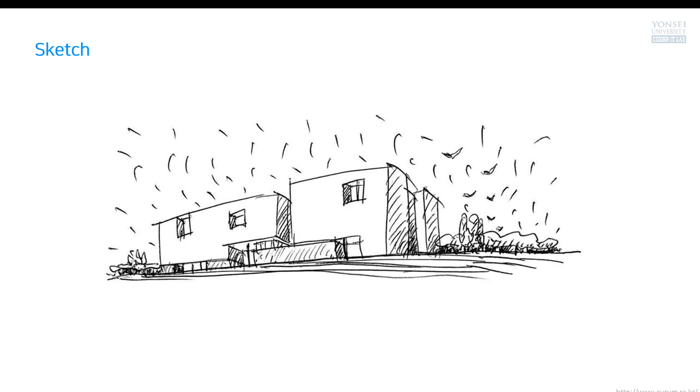At first, I show you this one, sketch. Take a look. It's a real sketch, hand drawing sketch. I'm not sure the concept of this one, but obviously it looks like some kind of huge mass object. But take a look. What if this mass was something like this? One piece of mass, one chunk of mass. That's not that interesting, right?

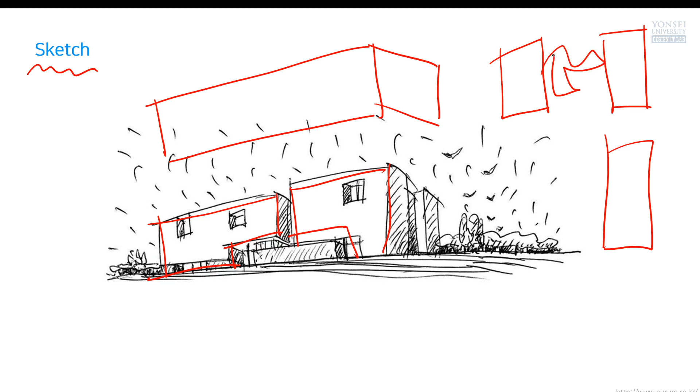But what if the architect designed something like this, small sized or high rise or some totally different shape? In that case, some efficiency or some economical problem possibly happened, right? But this is too boring, right? It's too much simple and kind of classic, old-fashioned modern building.

So the architect's intent was something cut off the mass here, and something inset, and something divided, and so on from this chunk of mass. I'm not talking about the concept or some approaches. I'd like to show you the actual example, actual dormitory. You're supposed to be here anyway.

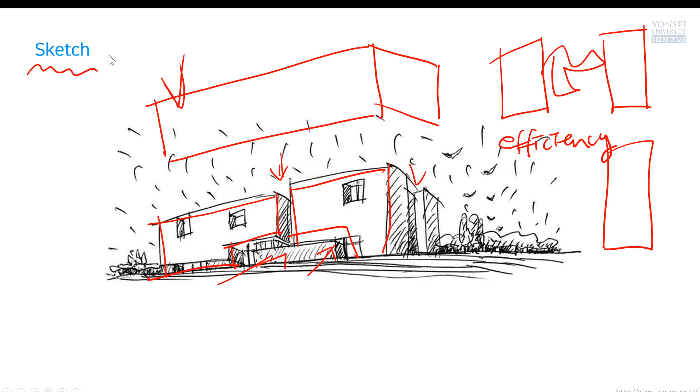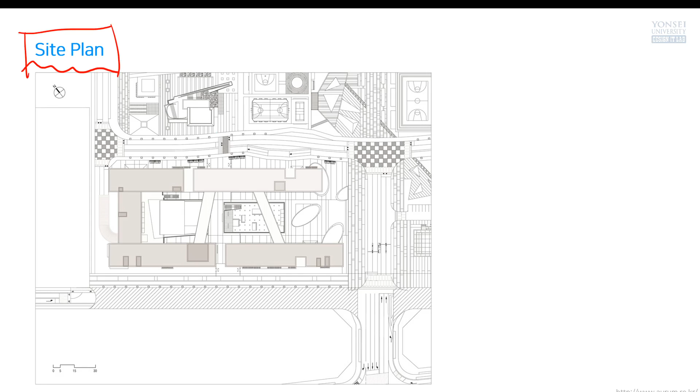Next thing is site plan. I showed you sketch, but actually this is not sort of industry standard, okay? Site plan, actually this is one of the industry standard drawings. At the beginning of the drawing representation, site plan helps people understand the building mass, take a look. Two long rectangle shapes and their connection, and two bridges and some cuts, some insets anyway. So thanks to site plan, we can find out the building's mass.

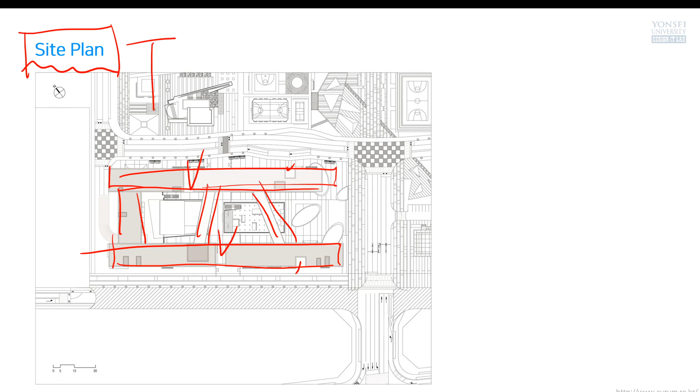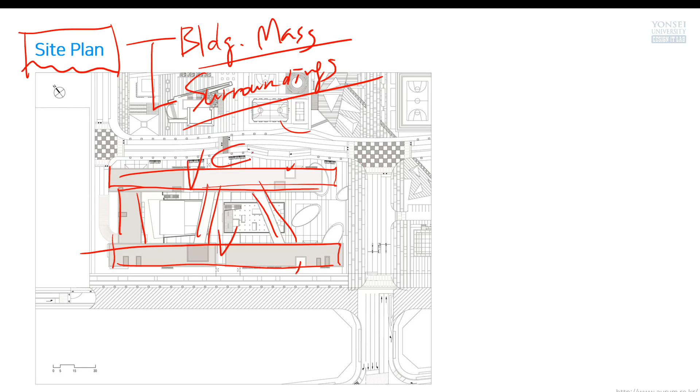Another one is surroundings. So two main things we can get from this kind of site plan view. Take a look, surroundings. Some court for basketball, I'm not sure, and some kind of gardening, landscaping, and some access road or certain types of outdoor facilities. I think this is a bicycle rack. I think these are bicycle racks or some similar structure.

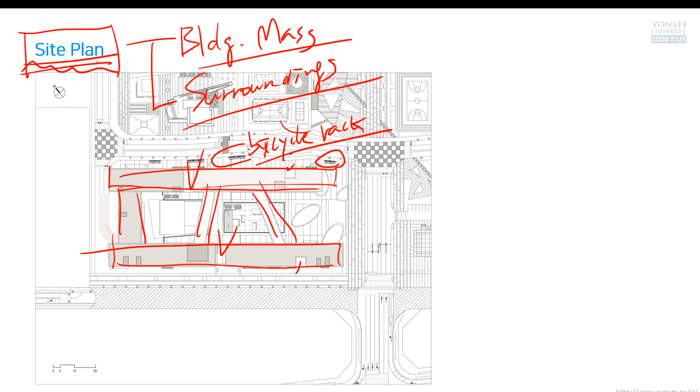Anyway, site plan is one of the representative industry standard drawings. It's under the category of plan drawing, but this is site plan. The most important thing and most representative thing is floor plan. Take a look at this floor plan.

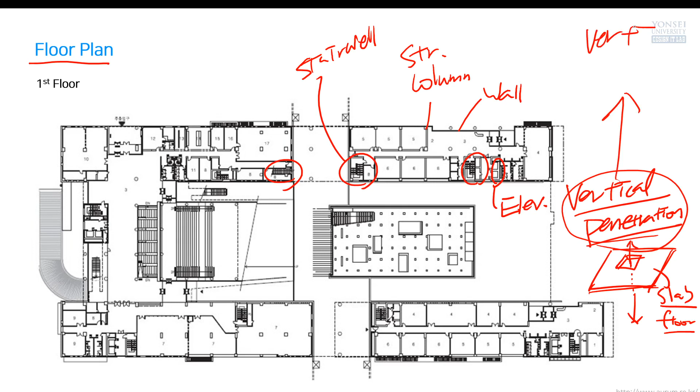Penetration is here, okay? We can go up, go down by using stairs or elevators or even ramp or escalators, right? This is slab, floor, physical actual floor, usually concrete. So this concrete structure mostly covered, but something opened. That is vertical penetration. Why we need this vertical penetration? Of course, for vertical access or vertical circulation.

For accessing floor by floor, we need vertical penetration, and we usually call it building core. So this building has a lot of vertical penetrations and cores. Why? This is really huge, actually not that huge, but relatively big sized building, right? So in certain architecture law, architecture code, so-called building code, in Korean, this one,

because of building code, we have some kind of minimal placement for this vertical penetration or elevators, number of elevators, number of stairs, or even number of toilets on each floor, something like that. They are all regulated by this kind of code. Anyway, my point is, take a look this kind of professional floor plan. You don't exactly know what this kind of representation, what this kind of symbol means.

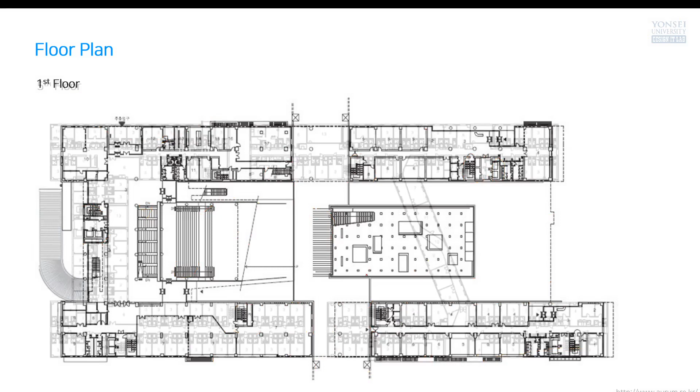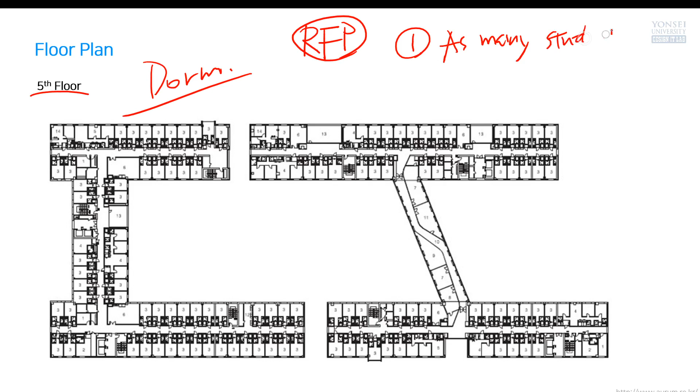Take a look. Fifth floor, I told you this is a dorm building. So dorm building means as many students possibly occupied. That's the top priority. I'm not sure the RFP for this building, but usually we can imagine top priority is as many students as possible. Actually, I'm not sure this one was the top priority requirement for designing and constructing this building, but usually this is very important, right?

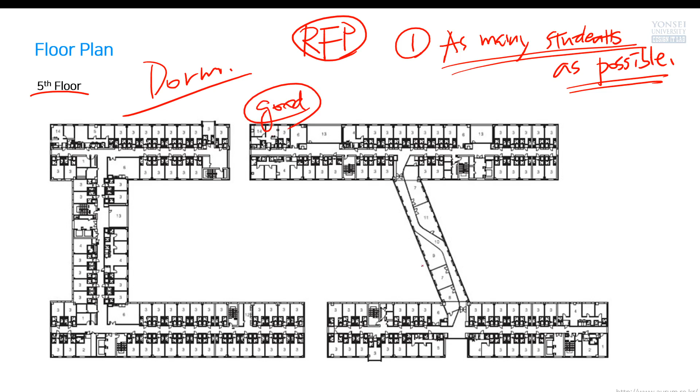So take a look. It looks like a cage or something, but it's not cage. Actually, when we see this kind of floor plan, it looks like very, very high density and not that good for residents. But in my experience, compared to other dormitories in other universities, this is really, really good building, okay? Really good. Trust me. Relatively really good. Anyway, my point actually is showing you plans, representative floor plan, okay?

Next thing is elevation. Take a look, front elevation. Okay, I forgot. What's the main goal of floor plan? It shows you layout, okay? Layout and a lot of something else can be possibly represented on top of this kind of floor plan. But you can easily find out the spatial allocation.

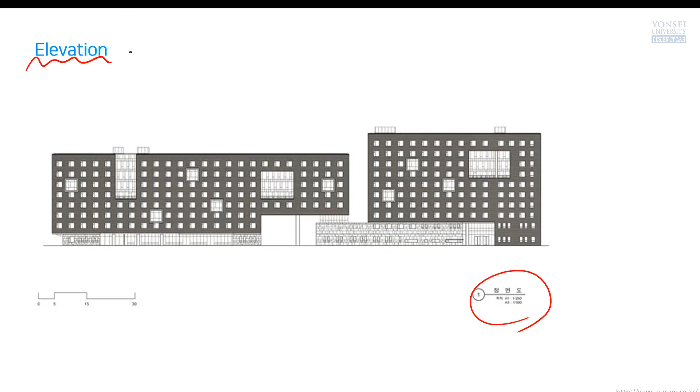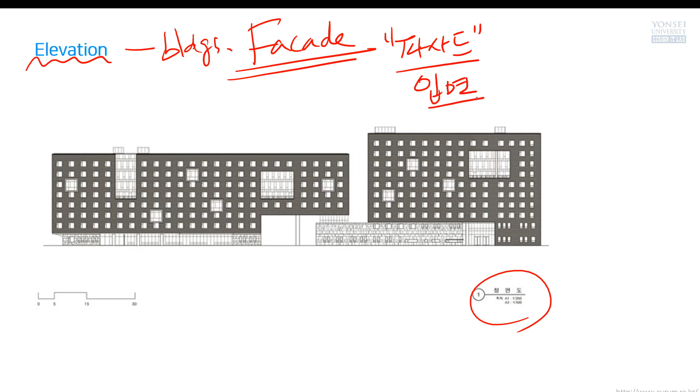In other words, layout. Okay. So what's the main objective of elevation representation? Buildings, facade. This is a French word, not English. Anyway, in Korean, same, facade. Okay. Facade means in Korean, this one. Take a look. What kind of cladding system? You can find out the meaning of this one in the dictionary. Cladding system simply means this one in Korean.

Cladding and facade are a little bit different. Cladding means something about structure, material, shape or color, but facade is the overall image of the building. As you see, very rectangular shapes in order and some kind of dark colored tile wall surface, and something a little bit different in lower places, some cut parts and so on.

So the designer's intent was that this one is not going to look like this one. Take a look. Just a simple rectangle shape. It's boring, not that interesting. But this one has this kind of cut and something above, something like this. Okay. Something different from the original mass shapes. Anyway, thanks to this elevation, we can easily find out the shape of this facade, the image of the facade, and we can make a best guess about cladding systems, material, or details, and so on.

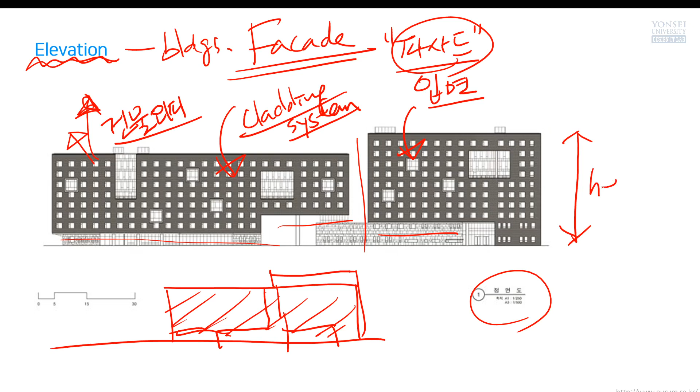And also we can find out height. This one is dimension. Where's the dimension? Probably dimension was missing from this floor plan view, but thanks to this elevation, we saw dimension. So thanks to this dimension, we can find out the length of this one is 5 meters. So something similar to this one, 5 meters. Okay, so we can think the height of this building is taller than 30 meters, right?

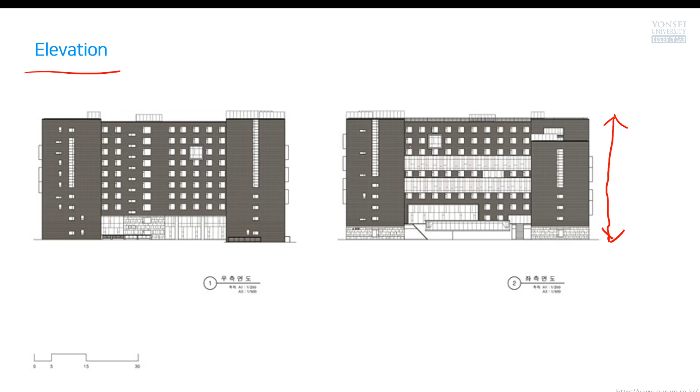Okay, take a look. In this elevation, we can find out the height of the building, but actually it's not that easy to find out the floor height, the ceiling height, or something else. But thanks to this section, we can find out how many floors are modeled in this design and the height of the floor. And this is plenum space. This is ceiling, this is the slab, okay? Let me show you. It's not that easy to draw this one. This is ceiling height and this is floor height. Again, this is so small, so let me carefully draw lines here.

This is floor, sorry. Okay, let me erase. Okay, let me go back. Let me erase. Okay, I can't erase. I don't know why. Okay, let's do it again.

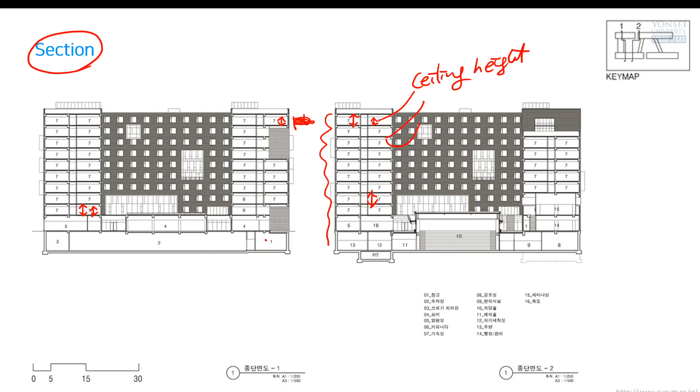The height of this one is ceiling height. And the height of this one, slab to slab, is floor height. Thanks to section view, we can find out ceiling height, floor height, number of floors, some details about vertical penetration, vertical circulation, and so on. And also take a look. This is section 1, section 2, and take a look at this key map. This is the section profile.

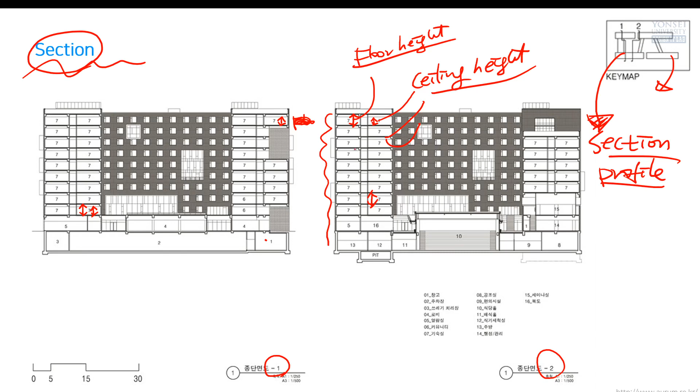Why is this section profile needed? Of course, otherwise we don't know where it was cut, or the location of this section's line. So by using this simple floor plan view, we simply draw those two or even more lines. So this line simply represents the section profile and the location of this cut. Okay. Next, also another section. Take a look. This time, this is a horizontal section line.

Thanks to this section profile, take a look. This is the location of this stairwell. Okay, stairwell. And take a look. In this stairwell, there is no slab extended, which means totally penetrated. And also, take a look at this one. This is also a stairwell. Of course, there are some slabs, but between the stair rises and skipped floor level stairs, and this slab is actually for stairwells, not the floors.

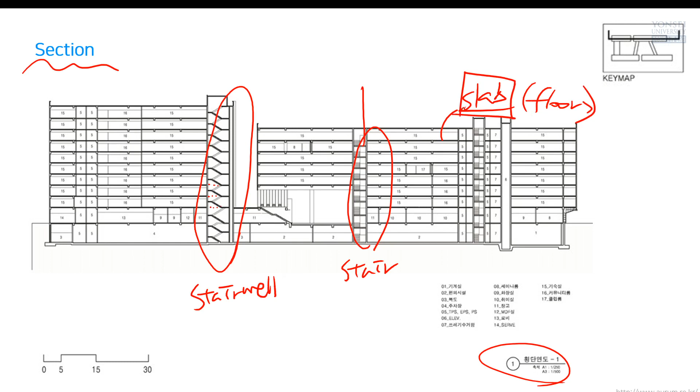Okay, this is slab. In other words, floor, concrete floor, and in terms of building structure, this is slab. Okay, and take a look. What's this? This is beam. Okay, in Korean it is this one. And take a look at this one. This is column. Okay, column and beam sustain this building because they are very important structural elements, as well as those slabs.

The reason to show you the series of those images, professionally made architectural plan representations, is an additional thing. In other classes or next semester's drafting course, you are going to learn detailed things about those symbols and structures or representations. Actually, they are not that critical, not that hard to learn. That is why I additionally introduce you to what these mean.

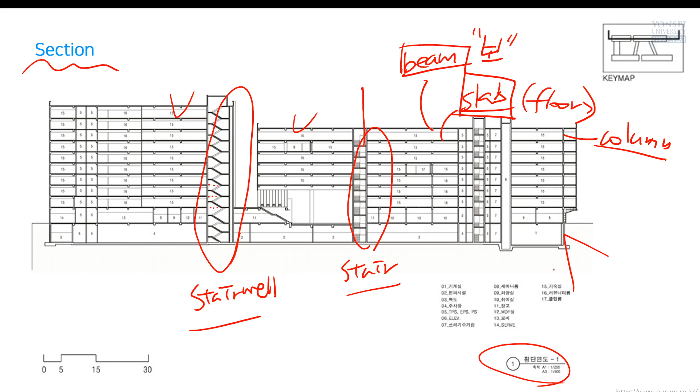But my point here was I like to show you industry standard representation of building. What are they? Simply put: plan, elevation, section. That's all, only three.

In Korean, this is industry standard representation of building. But you know what? I told you there is no strict regulation or building code law about this one. This is sort of de facto standard. De facto standard means they are not governed by an international standard organization, like ISO or UN, OECD or something else. They are not governed by some official organization or group of members.

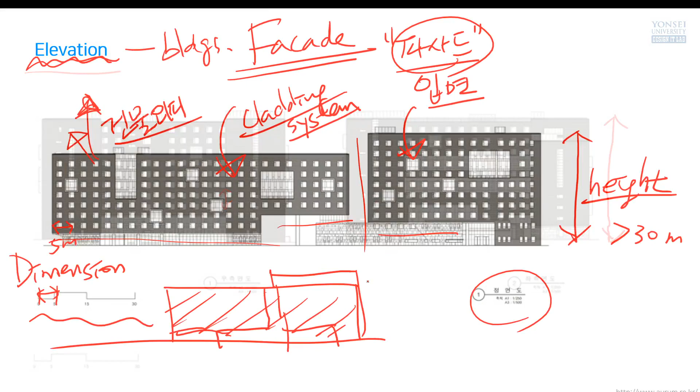So the reason for showing you this example is what kind of industry standard drawings are usually represented and what kind of information they have. That was the topic, okay?

Next example is actually an interior design and construction example. As an extended example from last time, I'm going to show you another H University interior design case. Actually, in Korea, unfortunately, interior design is usually integrated into construction. In other words, of course there are some interior design companies, but mostly they are interior construction companies. They are doing their interior design job as well in their actual projects, because interior design usually it's not a big project, okay?

Especially commercial or educational buildings, the size of the project is not that big. So usually a construction company accepts and gains their new interior construction project, and in the meantime they provide interior design. It's sort of old-fashioned and something undeveloped manner. It's not an advanced style. But anyway,

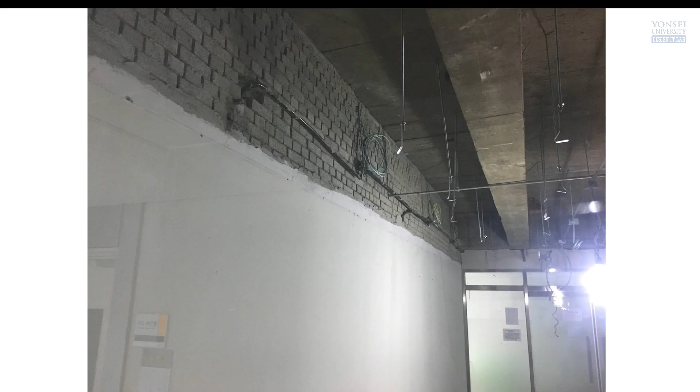Take a look. This is the location of the ceiling. It used to be this way, but I told them we are going to create an open ceiling.

Open ceiling means do not install a ceiling structure. So what is this? What is this?

This is slab, okay? Concrete slab. What is this? This is beam. In Korean, it's this, okay? And somewhere here there are columns, okay? So basically, building structure is something like this.

There are columns, okay? There are columns like this. Another column here. And there is another concrete on top of those two columns. This is beam. This is column. Okay? Thanks to this very, very strong column and beam structure,

relatively thin concrete can be loaded on top of it. Of course, there are some more columns and beams, right? More columns, more beams, and then this slab can be loaded on top of this structure, okay? So this is so-called,

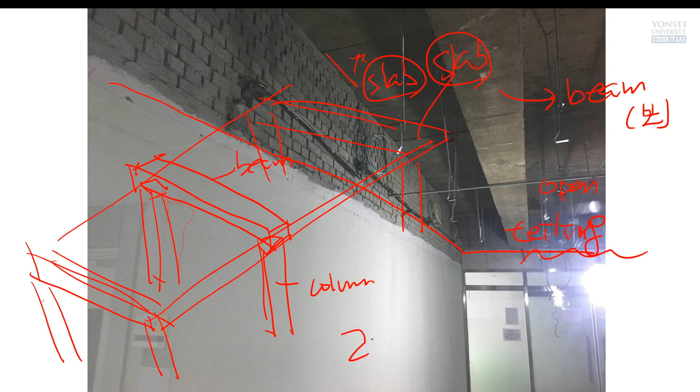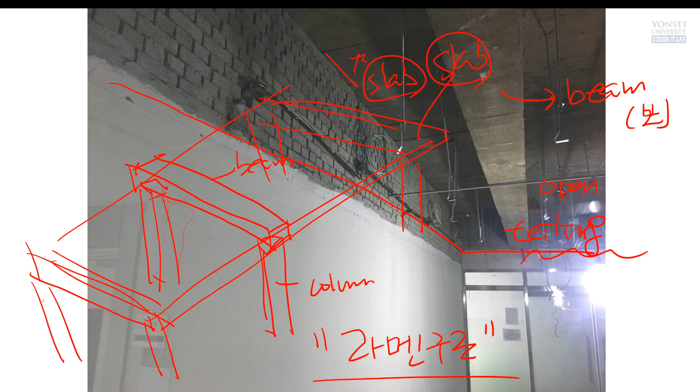in Korean, this one, university buildings, office buildings, concrete buildings, usually in this structure, but not your apartment. Your apartment has a different structure. Anyway, this is a very commonly found structure in university buildings, office buildings, or some kind of mid-rise buildings and so on. So thanks to this removal, we could see this structure, and then I could introduce you to something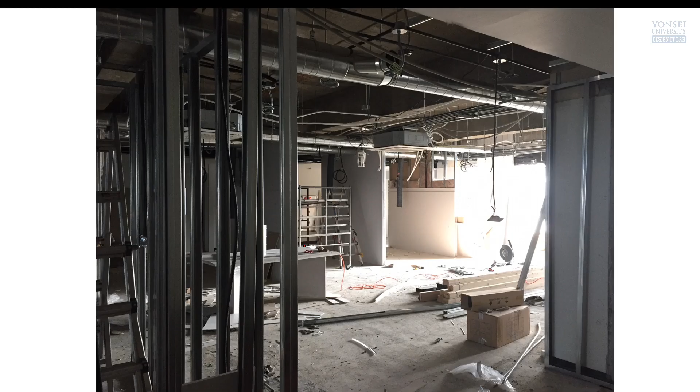like this. So take a look. These are some electrical systems and mechanical systems. It's air conditioning, right? Air conditioning system. And take a look, some construction process.

All these are non-load bearing, which means in Korean this one. Okay, that means they are almost close to partition walls, partition structure. That is why it's not that thick.

But for soundproofing and some kind of minimal strength for maintenance issues, anyway, something infill or exterior fill, they constructed using appropriate material and structure in this way. And also new installation of this kind of mechanical system.

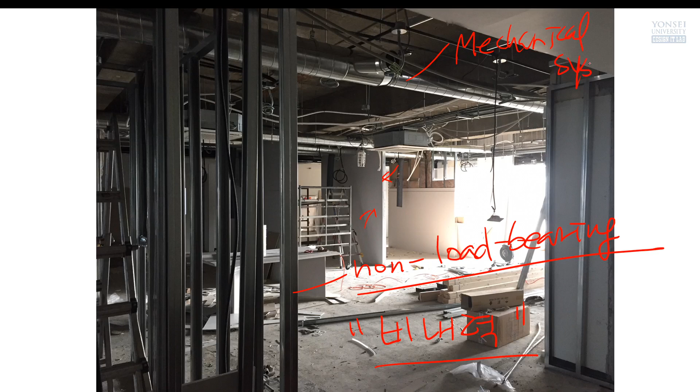Okay, next picture, another mechanical system, and inside the structure of this wall, non-load bearing partition walls. A lot of partition walls are here for separating the meeting rooms, okay, meeting rooms.

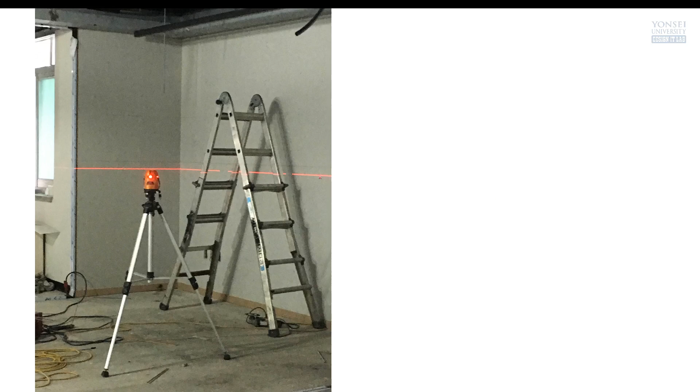Mechanical systems and workers' actual field, desk field floor. And take a look, this is a laser line drawer. So why do they need this one? They want to measure very precisely calculated or measured height.

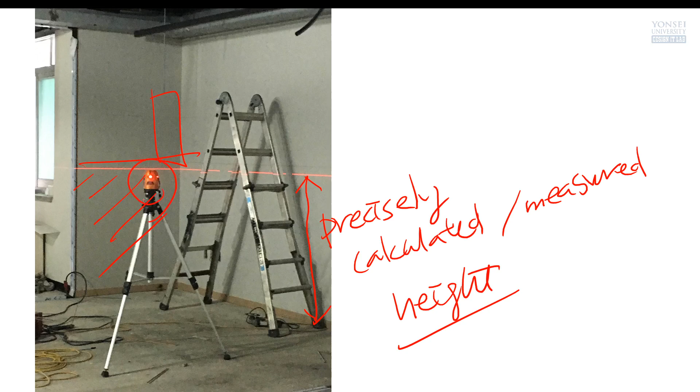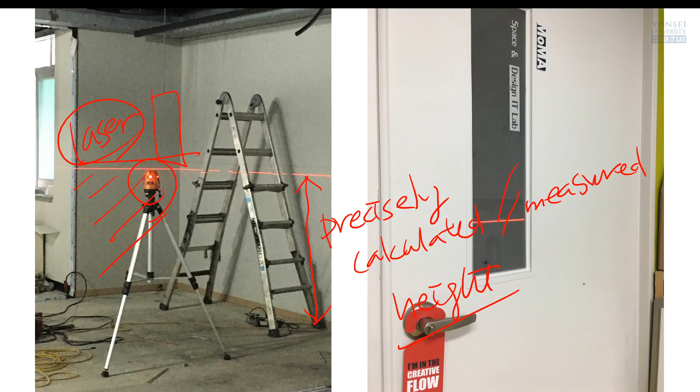Sometimes they need to install a certain type of different material, or they need to draw something or install something. Anyway, for construction reasons, nowadays they use this kind of laser thing for drawing this one. This is laser line, and this used to be my office, okay, my office. When I was working in my office, I saw this laser line, so that's why I could take this picture

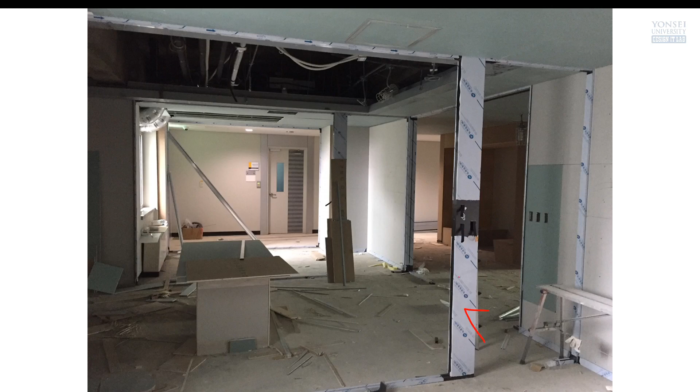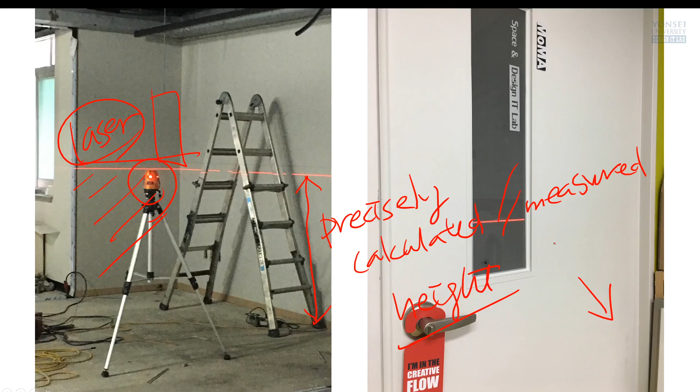We used some spray. In Korean, it's something like this one, okay? That's kind of a field term, okay? Thanks to spray, we could paint. Actually, it's not a paint, totally dark black color. So at that time, my color code was black and white. Something dark and something bright.

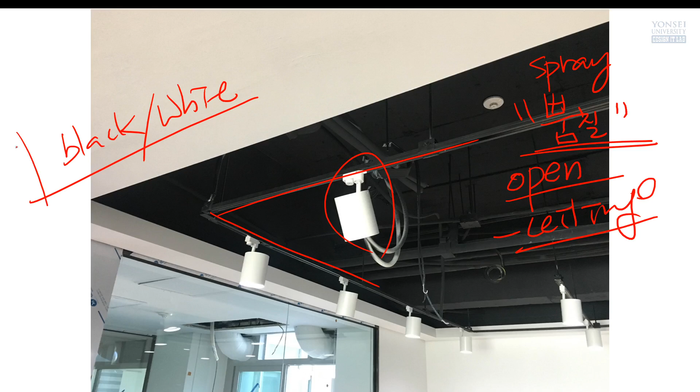Very contrasting color scheme. But anyway, this color is so-called safe color. You know what? At that time, when I was in charge of this kind of color scheme and material for this kind of designing details, I chose a very safe way. You know why, right? What if I used green, red color, or some very orange color, or some rainbow colors, whatever? If I used that kind of colors, probably someone could dislike it. Really dislike it. Even though some people love them. So that is why I'm saying black and white, and they call it so-called safe color.

And the final output also looked not that bad. I think that was really great.

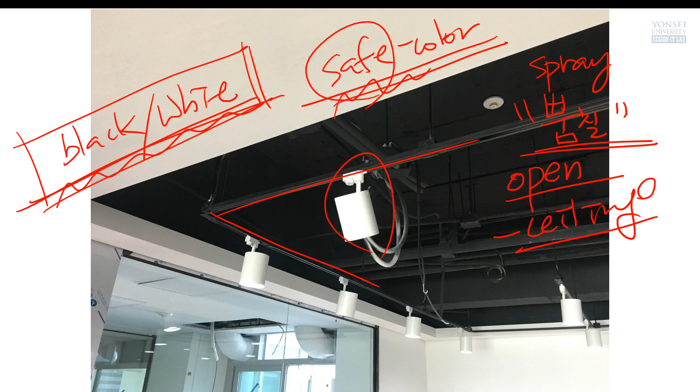So at that time I told you dark or bright, in other words black or white was my concept. So I used this kind of thing. Take a look at this frame color, dark, black. Take a look at this floor, dark. This side floor also dark. But wall colors, some lighting colors, or additional things, they are all white or very bright colors.

So as built, take a look. How about this? This is an open ceiling but dark colored, that is why it's not that visible. So we can hide some mechanical systems, electrical systems, plumbing systems, and so on. Instead, those white colored lightings are very, very saliently looking, something like this. So they are looking okay and good.

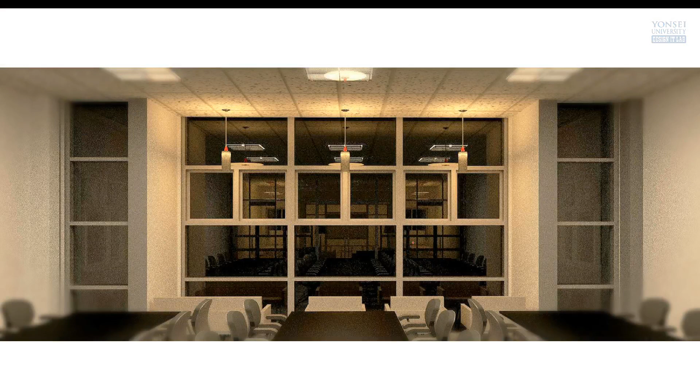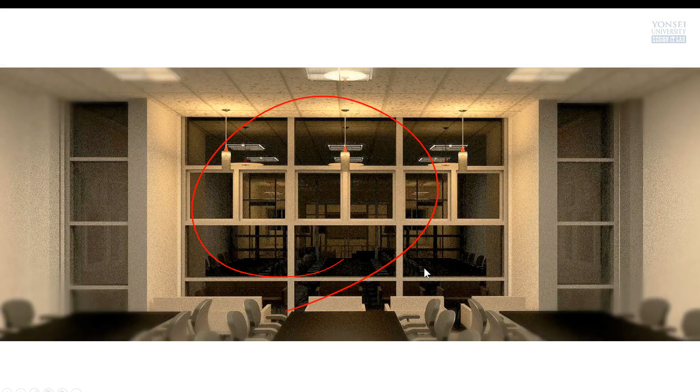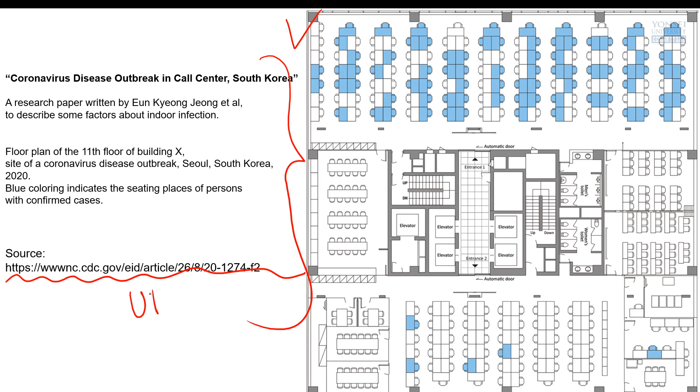Find an example of a professional interior floor plan, image plus information. Let me show you my example. Here is an example, just one single page. Take a look, I chose this professionally looking floor plan, and take a look at where I found this floor plan, and also the source URL, this is the URL. Source URL should also be given to me.